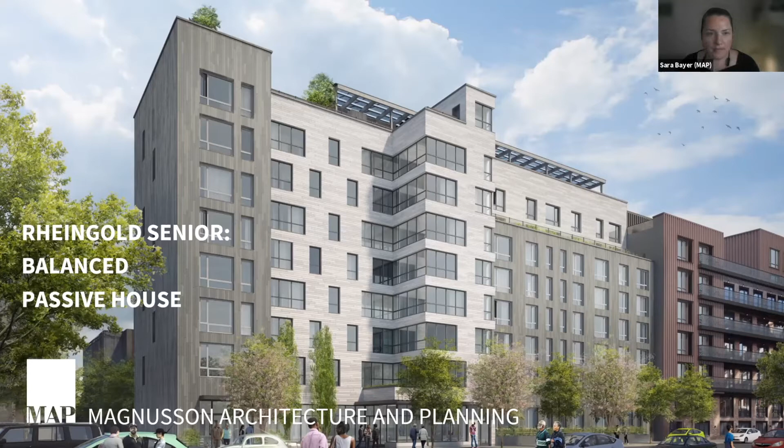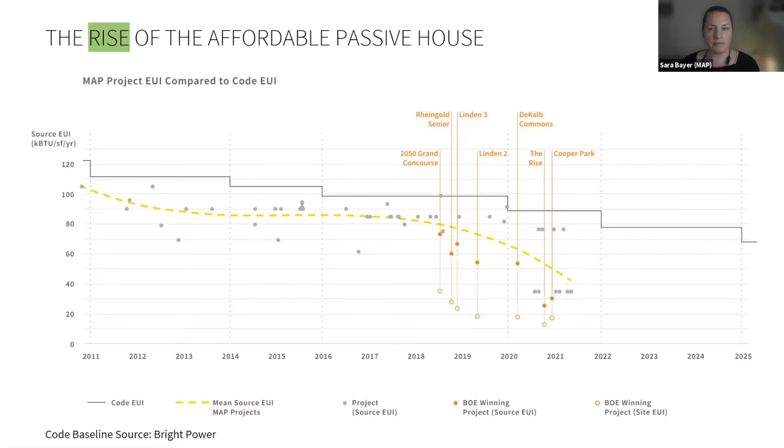The senior building has studios and 1 bedrooms. I'm going to touch on how we're balancing not competing, but different aspects of the building with passive house targets. So balancing passive house targets with cost, balancing with embodied carbon considerations, and balancing them with a dense senior building. The site is in the former Rheingold brewery in Bushwick.

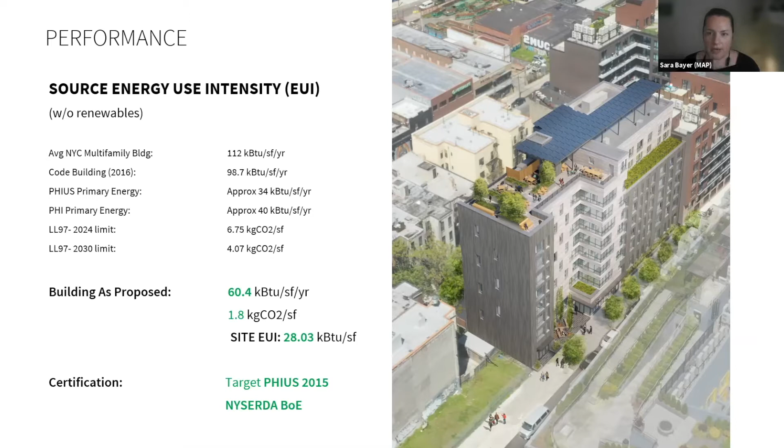Another interesting point here is that the air tightness in the code, for each component taken by itself, could meet the passive house targets. But what makes passive house different is that all of these really tight components together have to meet that total air tightness.

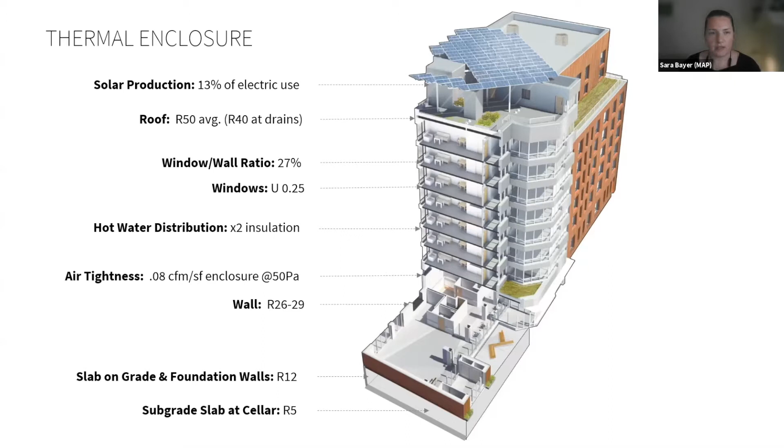And we also don't need triple pane windows usually in these internally load dominated buildings. We would need it sometimes for the comfort criteria, but I think between the standards and the different versions of the standards, that comfort criteria is changing. So we like to balance the embodied carbon of that triple pane glazing with the operational and comfort criteria. So most of the time we don't do triple pane.

One of the wonderful things about passive house is the deepening of the relationship between MEP engineers and architects. They really need to rely on our passive house envelope to right size their equipment, and that makes for a better collaboration. So this project will be almost all electric. We do have an alternate for using a heat pump to make the hot water, which is becoming a pretty standard consideration in most of our projects. We have a fair number of them in the office with that air source heat pump.

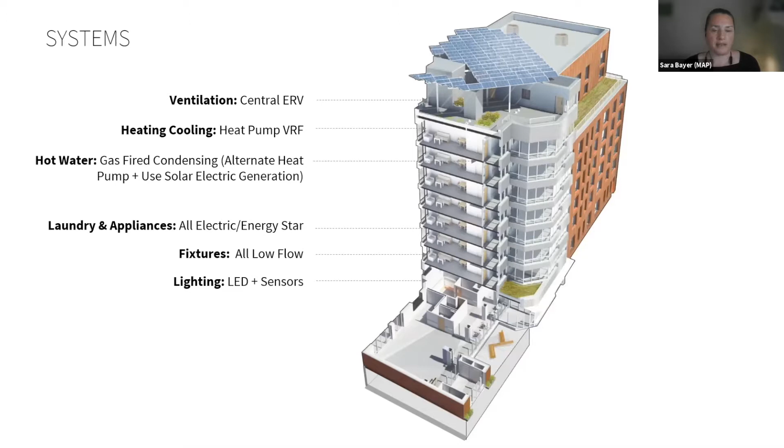So balancing cost with passive house, it really depends on what baseline you're looking at. For this project, we were targeting the same systems that you would need for passive house, the ERVs and the VRFs. And in our typology, we have Enterprise Green Communities, which is very common in the States for affordable housing, and especially in New York City, where we have to be 15% better than code in terms of cost of our energy use. So with a great baseline in those systems, we knew we wanted to have a healthy building. So VRFs and ERVs were critical for that.

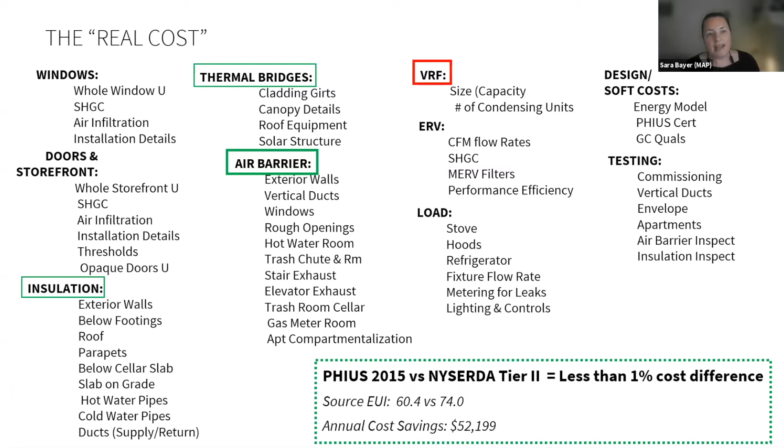And the biggest savings was in that relationship between the envelope and the systems, where the condensing units for the VRF actually were able to be 20% smaller in the passive house option. So that was a critical savings we were able to capture and show the annual cost savings, which convinced the client to go to passive house.

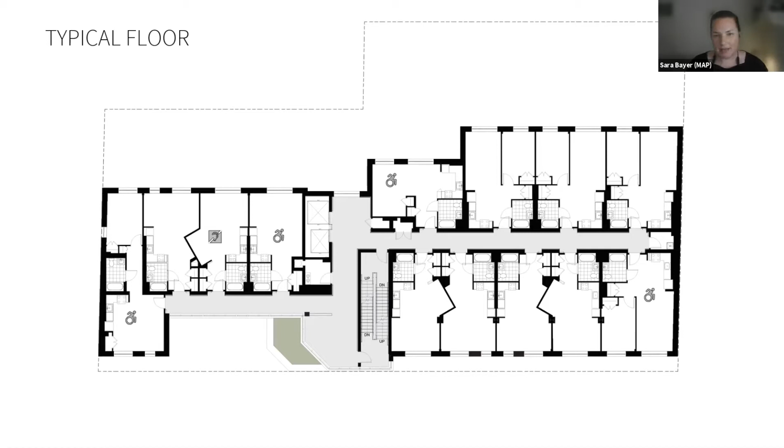And here's a view of those interlocking alcove studios. With senior living, it's critical to try to give a studio apartment in particular a variety of spaces so that people can live perhaps with an attendant, or two people can live in a studio together.

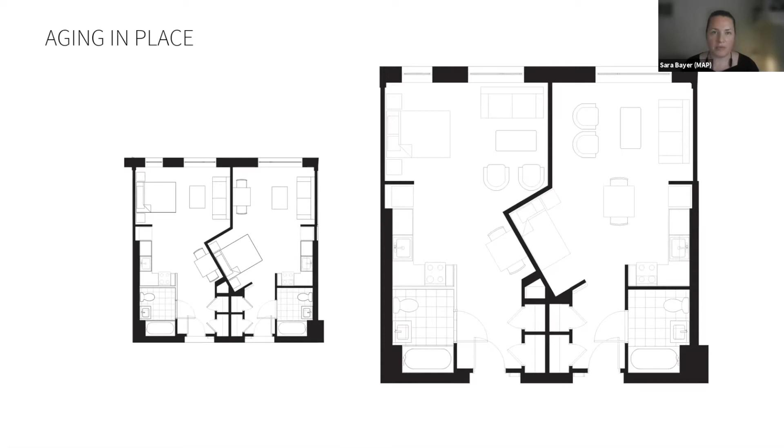Another important aspect I wanted to mention here that's required by Enterprise Green Communities, this affordable housing baseline, is apartment compartmentalization, which reduces stack effect in a large building like this, and also contributes greatly to the healthy interior of the apartment, reducing smells from your neighbor. And it's actually pretty much required by code to do anyway. It's just another kind of quality control aspect, kind of the same concept as with the exterior envelope.

When designing the VRF system with the evaporators in the units and the condensers on the roof, there are a lot of considerations when using them in this typology. Normally the landlord pays for heating. How do you bill for cooling? Because the condensers that use the most power are on the house meter. The evaporators just use a little power for the fan in the unit. So normally we have a third-party billing system for the cooling, or the owner pays for cooling, which is about $40 a month or so, depending.

Another consideration is to try not to give as much flexibility in terms of the mode of the unit, heating or cooling, and we do that by creating zones by facade, for the environmental exposure. You really want to watch quality control of your condensate during construction. Those pipes, if they get kinked, can cause issues.

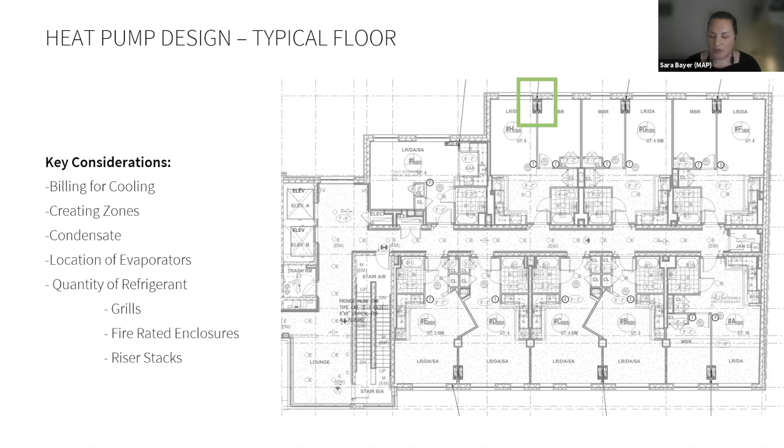And you can place your evaporators close to the exterior or in a little bit. We use wall-mounted ones instead of ceiling-mounted ones, because we have pretty tight floor-to-floor heights in our typology, and usually we don't have a drop ceiling to place them in. I'll get into it a little bit more, but the refrigerant distribution is a lot more efficient in this sort of vertical riser condition.

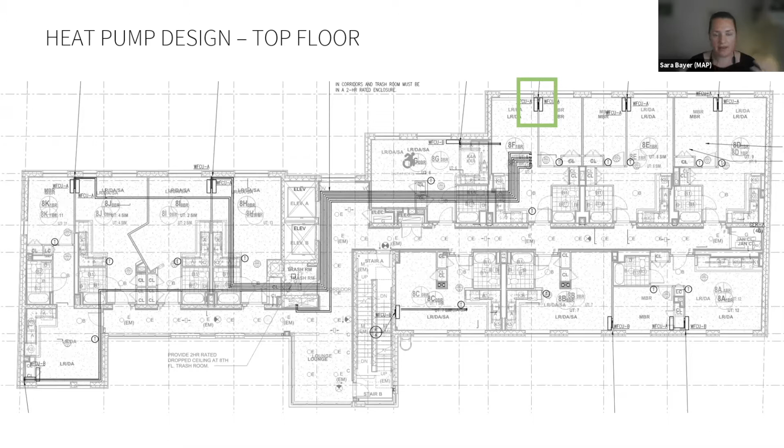So this is our top floor, showing that we have an occupied roof on the west side of the building. So in order to get from the evaporators to the condensers, which are all located on the east or right side of the building, you have to have these offsets. This shows how much more refrigerant and how many more refrigerant lines you're adding if you're not thinking through early in the design how the evaporators are connected to the condensers.

This is another project that is exploring heat recovery as an option, which is perceived to give more occupant comfort, but in the end, we find other ways of giving that control by zoning the facade. And in energy models, it doesn't save that much energy. And you can see how much more refrigerant and potential for leaks there is with that kind of horizontal distribution.

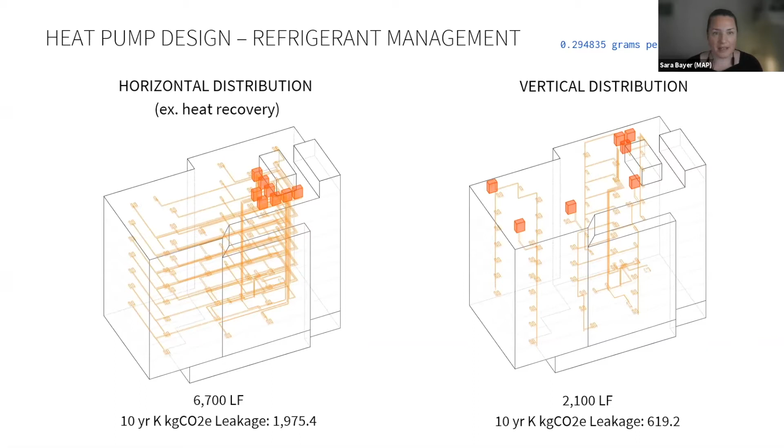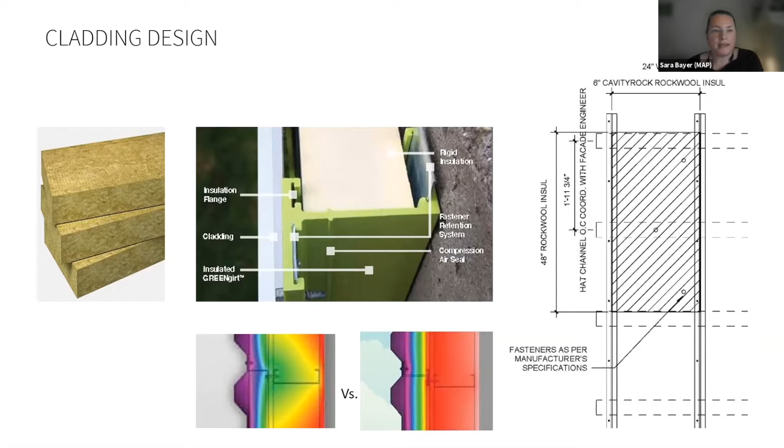This is the cladding design, which uses thermally broken girts spaced according to the size of the mineral wool insulation, so that it's quicker to install. There are fewer penetrations attaching the insulation to the backup wall, and it's thermally broken.

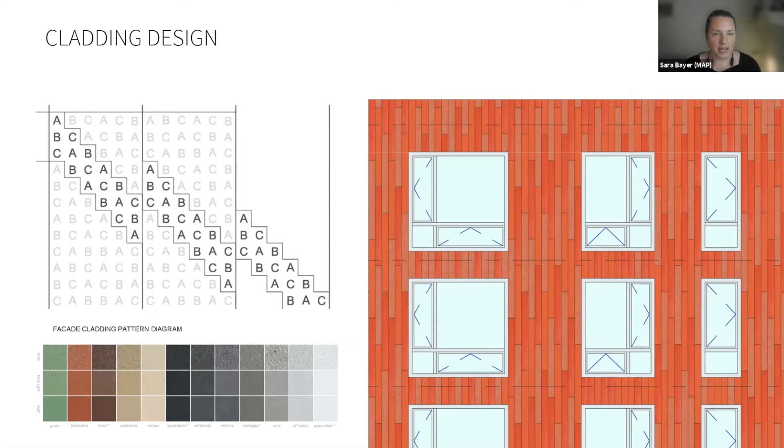And in the cladding design, the space between the windows is based off of the size of the cladding, to minimize the amount of cuts of the material. Actually, this product is the waste cut from their other manufacturing processes. And the design here is to not have to create shop drawings, but just a pattern, so that makes it easier and cost effective.

A lot of our structures are block and plank, which is CMU block and precast planks that span about 30 feet. But in this building, you might have seen in the plan or noticed that we have a single loaded corridor where the lot is really shallow. So we have this sort of steel framed facade where we have some public space next to that lounge.

And that steel frame facade, we really worked hard to keep that steel off the face of the building so that we could give a nice clean surface for the air barrier to be applied to without a lot of ins and outs and things to overlap. And so it's difficult with this. The structural engineers really like to line up that steel I-beam with the center of the CMU of a parapet or the walls above, for example. You can kind of tell, I'm sorry I didn't draw a center line, but they're offset.

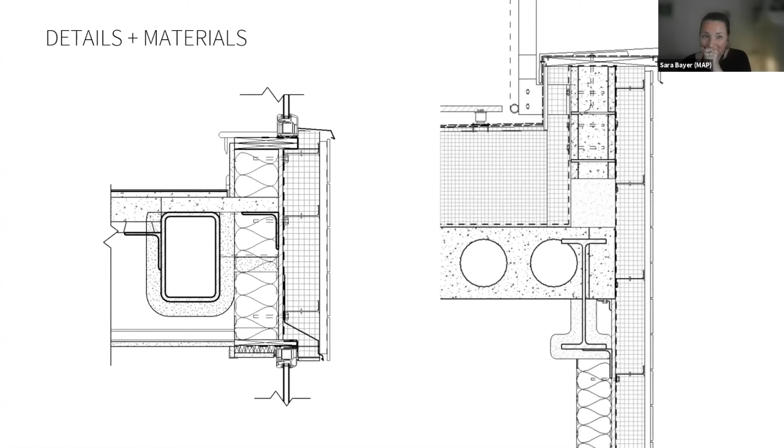This is a view of our sill and jamb using the same size. The size of the panel actually fits perfectly with the jamb of the window. So we were able to cover the jamb with that panel.

And lastly, just a short note about embodied carbon. You've probably seen that we're using mineral wool, which has lower embodied carbon than other foam choices for rain screen. But this product we're extremely excited about. It replaces two products, the gravel layer and the subslab insulation, which could typically be foam. It's a recycled glass aggregate. It unfortunately has the word foam sometimes in its name, but it's low toxicity. It has about an R2 per inch.

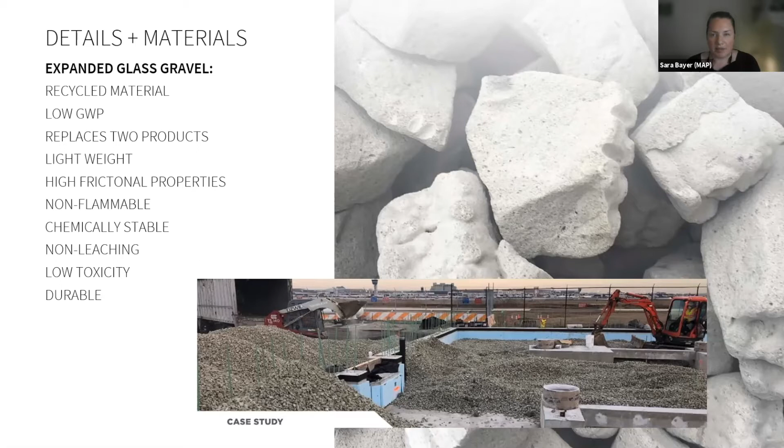And on this project, we actually needed an SSDS system, which is subslab depressurization. So we needed to have some airspace in that gravel layer in order to control the vapors so that they wouldn't get into the building. So they're sort of funneled into these tubes and then out through a fan on the roof.

So we went through the Office of Environmental Remediation to get this foam glass approved instead of the gravel layer, which would normally provide that airspace. But at the pipes themselves, we actually need to have that true gravel around the pipe, and then we can have 2 inches of the foam glass above that, and everywhere else the insulation of the foam glass. And that's it. I hope I didn't go too fast or too slow.

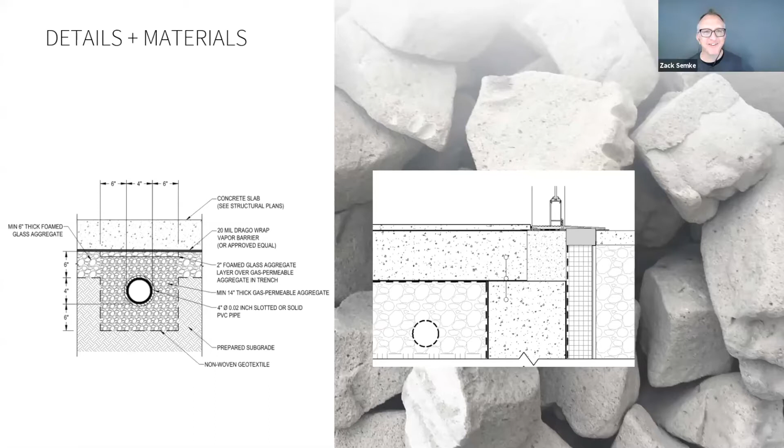That was perfect. Okay. It was great. So we'll just take a second. Zack, you want to go to sponsors?